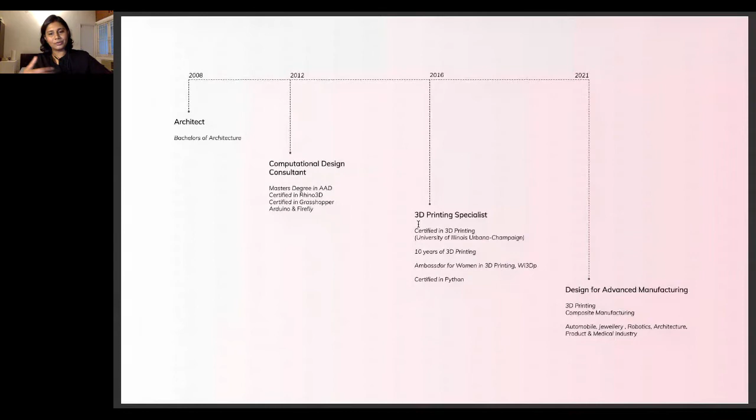Slowly I started working quite a bit on how to develop for 3D printing. A lot of passion comes in for me particularly doing design for 3D printing, so I wanted to slowly become a specialist in this kind of modeling. Since I have a design background, I didn't have much technological expertise, so to bridge that I did a certification on 3D printing, and slowly learned Python so I could code my own complex geometries.

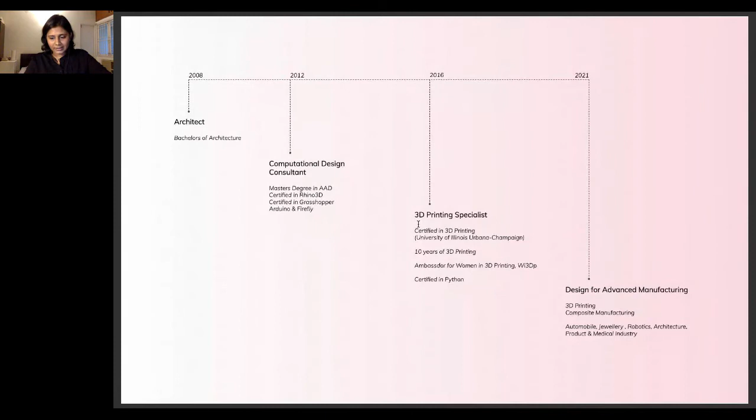Right now, what we've been doing in my company - almost 5 years old - is quite a bit of design consultancy, and not just design but also design development. Let's say someone comes with an idea but has no clue how to make it into an additive manufacturable model - we try to make an efficient and optimized design solution to be manufactured in a very optimized manner. That's part of what we do with the manufacturing consultancy as well.

Prototyping happens on an everyday basis, and one thing I love to do is share my knowledge along with other design teams as well.

So this is in a nutshell what we do, and I've been working with quite a bit of industries: automobile, jewelry, robotics, architecture, and product industry. Today I think this is going to be not more about what projects I've done, but how we've done it, what are the tips and tricks on handling the design process.

I believe that digital technologies are no longer tools for making, but they're primary tools for thinking. There's this famous myth that if you learn quite a bit of digital technologies, your computer becomes your master. That's not true. If you know how to use the right digital tools, your mind is always the master. That is something I really rely on.

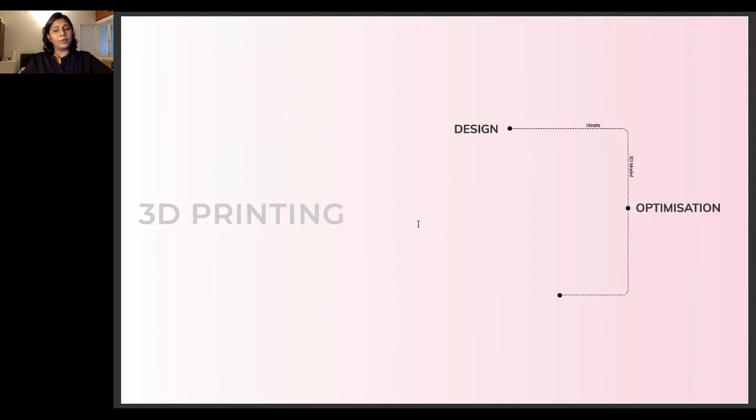In today's presentation, I'm going to be talking about three basic things, and probably highlight design and optimization. So what I mean by design is the process of ideating and then developing a 3D model. And once that is done, how do you optimize it? How do you make it efficient for manufacturing?

There are two things: you'll have to satisfy the clients, and you'll have to satisfy the user group. So we'll be talking a little bit more on those lines.

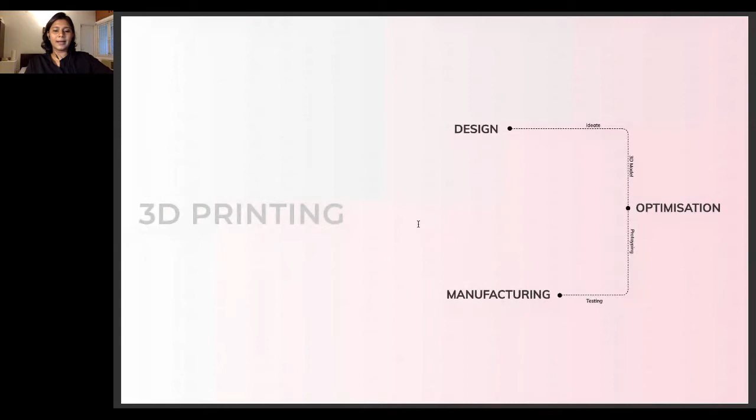And after optimization, how do you do prototyping and testing? What are the patterns of how you can get the user group for testing? We'll be talking about that, and finally the manufacturing process.

So 3D printing has revolutionized the way we think. Previously, you always think, okay, if I would love to design this form, but then is it manufacturable? That is always the question for any designer.

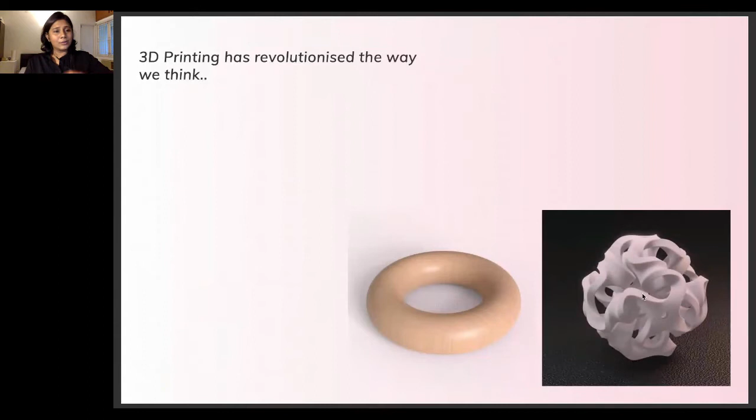Probably 15 years down the lane, you would think of a really simple structure, which doesn't have much patterns on top of it, not much complexity. So you would go with a very simple ring format. Now with 3D printing, your design ideologies can start thinking out of the box, go for complex forms. That is one way 3D printing has kind of revolutionized the thought process.

And the other one is how do you ideate it? Initially, yeah, you can sketch. If you're very good at sketching, cool, you can kind of make people understand how it can be done. But with 3D printing, you can do a quick prototype.

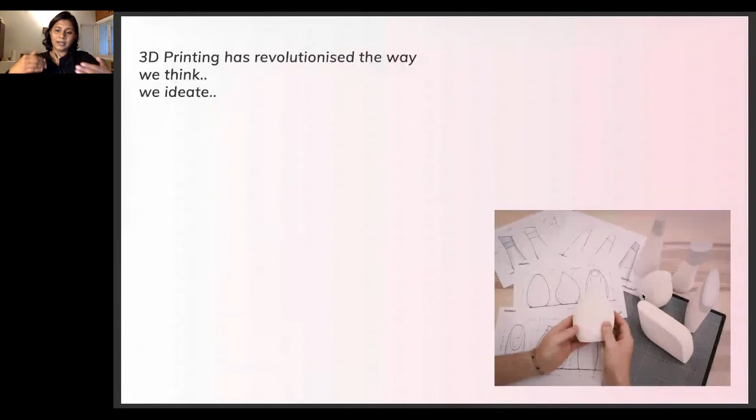I'm not talking about an end user prototype or a prototype that comes much after. I'm talking about in a very early stage, trying to understand the model, the touch and feel of it. Sometimes even the texture of it can be 3D printed. So redefining the aesthetics in an early stage is a very, very important factor.

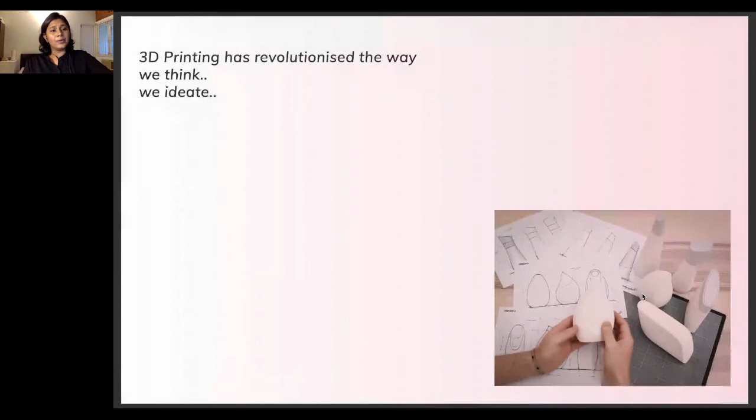Another one is testing out different materials. How will it be if it is transparent, and how will it be when it's opaque? So that's another possibility of your ideation process.

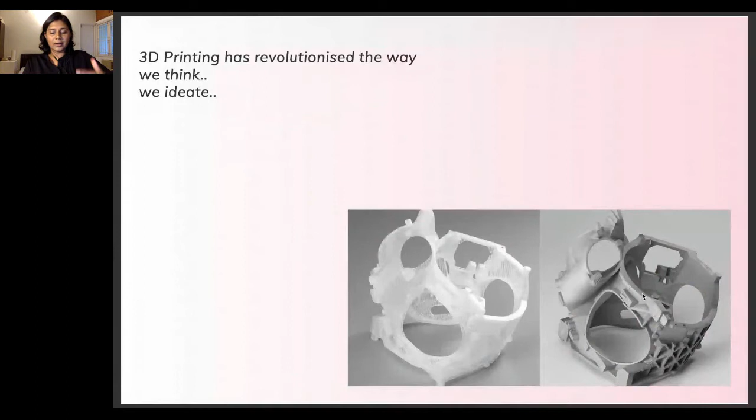And then the production. Production happens from a small part, from looking at a furniture, to this - I think most of you would have seen this - this is a habitat that they're trying to 3D print on Mars. So this is the kind of production variation that we are looking at right now in the whole world.

So the way you kind of think about it, look at this - this is a habitat, the shape of a habitat. Initially, it's all those pitched roofs that you kind of think of if it's Earth. But if it's Mars, you're thinking in a very different form evolution. So this is the whole idea about why I really wanted to stress upon how important it is to understand design, and how it is important to understand the end manufacturing, so you can do justice to both.

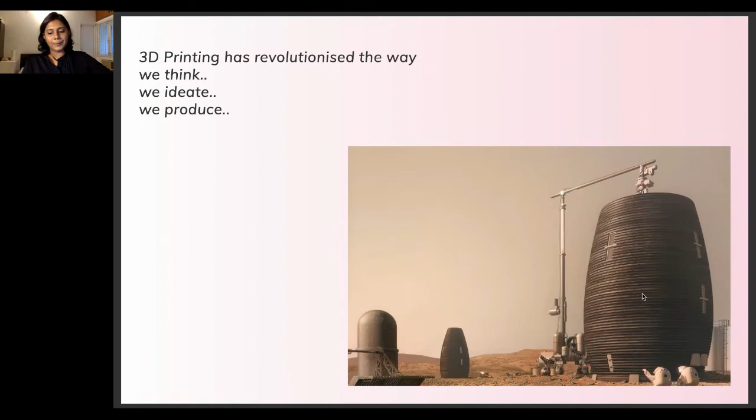Now looking at the process of it, I'm just going to briefly elaborate certain things I wanted to share today. So everything starts with the research and the preliminary data collection. Now understanding the client's brief becomes the most important starting point. And then once you're done with that, how do you collect all the data? Particularly, this is data collection that is a very intensive study on the design of the product.

Now, how do you do that data collection? You initially meet the user group.

Generally what happens is when a designer starts developing a product, once it's ready, probably in the testing time is when most people show it to the user group. But instead of doing that, what if you try to meet the user group in a very preliminary stage, probably in the ideation stage or while you collect data?

That helps you understand and determine the problems, the influencing factors, and the success factors. You set certain parameters, certain rules, and then determine what the design problem is. Once that's done, how do you find the most optimized methods and tools to develop the product, and how iteration works and how you can test it? But there's one thing most of us look at only at the end, which I really want to point out to add it in the front part.

What kind of manufacturing technology are we going to follow for this particular product? What form, what geometry makes it more efficient to be printed? That again comes into a very primary study module, which is your research and data collection—identifying and understanding the related manufacturing feasibility, so you produce a very holistic form.

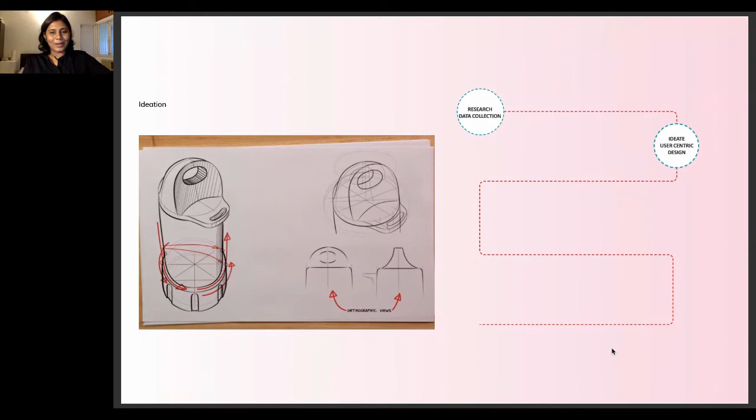Coming to the next stage, when you have the design problem set and the parameters you want to work with—for me personally, though I'm more into digital working, my initial idea is always in terms of a pen and a pencil, because I feel that's the quickest possible way for an output from your brain to come out.

Once that's done, I also try to embrace a particular design strategy called user-centric design, because most products have either a single user group or, in the case of train interiors I design, multiple stakeholders come in—how they touch it, how the anthropometrics work, how the ergonomics work. So user participation and understanding the user experience are very important.

Simultaneously there's the technology—what kind of technology and digital tools you're going to use to aid the manufacturing process. And then comes the business goals—if you want to satisfy your client, you need to find the strategic fit. This could be a whole huge topic, but it's something I cannot skip, which is user-centric design.

Coming to the ideation phase, I wanted to add a few tips on what you'd need to follow while doing 3D printing. The first very important thing is the material you start using. If you're trying to use wood, what is the limitation of wood? How can it 3D print—does it print via powder, or are you using wood with a bit of joinery together?

Maybe a plastic joinery embraced into wood, or a steel joinery embraced into wood. So you can always think of mixing materials along with 3D printing to get a natural feel into it, and innovate on the joinery part. This is something you need to understand first.

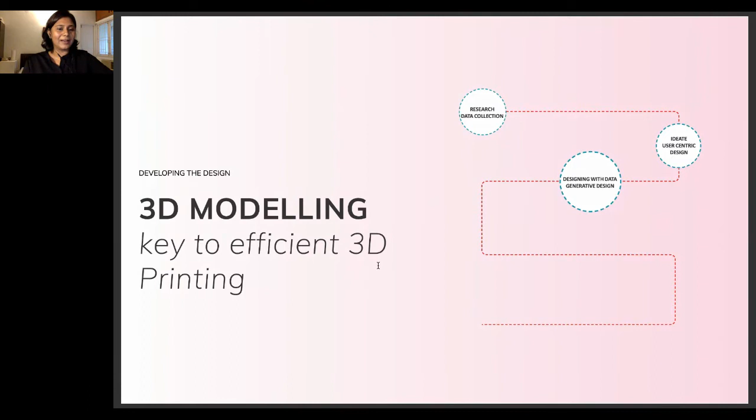So this is the general process for those of you who are a little new. You have an idea, you develop the idea via modeling software—there's Autodesk Fusion, Rhino, CATIA, AutoCAD. So there are quite a few things with which you can generate a 3D model.

The thing is, try to master one. If you can do simple to complex forms over time using one particular software, you'll be able to get advanced into it.

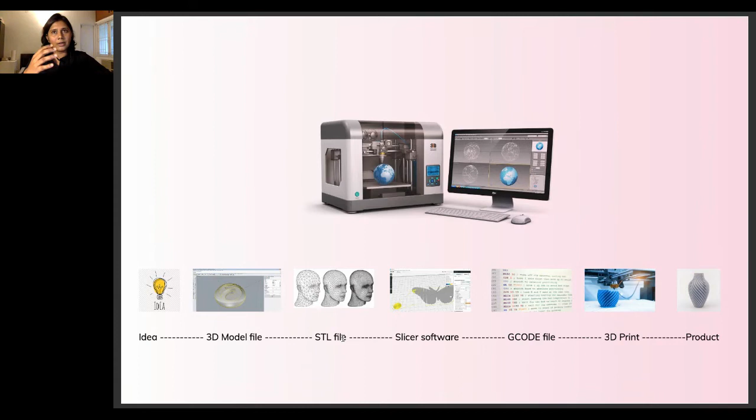Once this is done, you turn it into an STL file. Once the model is ready, there are a few tips and tricks I'll share on how to prepare a 3D model for printing. You slowly move to the slicer software that turns it into G-code and then ultimately prints. It's a very, very simple system—a translation of an idea to a product.

And that's the whole satisfaction and passion for me—that you have an idea, and quickly, in an hour or two, you develop the idea and create an end-user part. All right, so that's one more thing.

I extensively use Rhino—probably the only software I use is Rhino 3D, and I'm also an authorized trainer for this particular software. Grasshopper is another coding language I use for generating designs and iterations of the design. It's a very simple software tool, though this is the power behind the entire work that I do.

So I just wanted to give a little bit of an introduction. This is a NURBS-based software, which allows you to create any organic freeform surface or solid because of their flexibility and accuracy. NURBS models can also be used.

The whole idea of Rhino is also that it's a very good product to use for manufacturing because you have the natural lines, the natural curvature, surface curvature are very, very good, and you don't have much meshing that happens on the surface. So it's a very good thing for manufacturing as well.

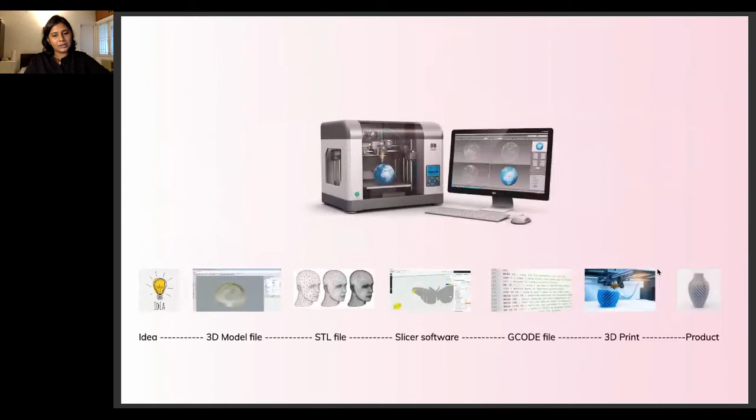We call it a file to factory system. Basically this is a one-stop solution that I use to get the idea, develop the idea, prepare the file for 3D printing and convert it into an STL. The entire process I showed you before, all happens in one shot.

And then I prepare the G-code file. In this particular software there are quite a bit of features, so I'm just showing you the first very important four things because we don't have a lot of time. But if anybody has any doubts on how you convert your idea or do 3D modeling, I'm always open to connect.

So the very first thing, coming to tips and tricks on how you handle 3D models: the first important thing is to work on a scale. Working on the right scale and the precision is the key to modeling.

The second one is working with functional prototypes. This is something I've seen as the most common error in most companies or individual cases. Particularly when you're working on functional prototypes that need to fit in and fit out, you'll notice that the minute you print, it doesn't fit. That's because of the tolerances.

Another is there's a really good command in Rhino that we use, which is for checking for bad objects. Everything may seem really good, but then when you put it on an STL software, you'll notice there's some error coming up. So you can use check for bad objects, which points out exactly where there's surface undulation, surface violation, or even an overlap in terms of structural error in a geometry. Then you can slowly patch up your model.

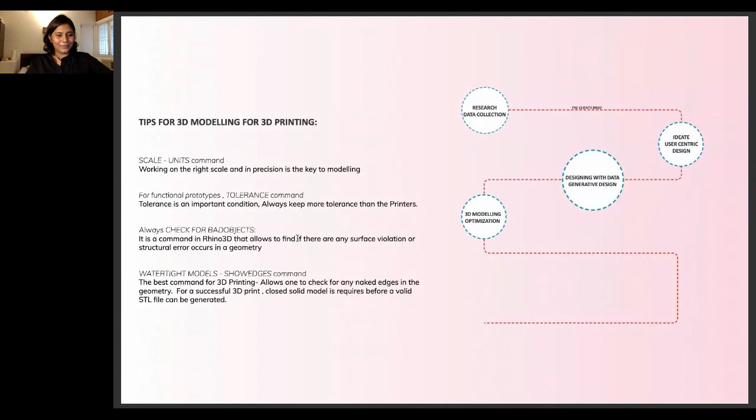So yeah, these are the tips. There are definitely 100 more tips I can tell you while working on this. But feel free to mail me or ask me for more solutions.

So particularly when it comes to design and optimization — let's say you've done a few ideas, but then the client wants a much more efficient manufacturing process. The next few conditions I'm going to show you are more about how much time it takes, and it's more into FDM technology, because we work with multiple industrial designers who make limited editions and so on.

So I'm just going to share a few simple conditions to start making you question, while you design, whether this shape will be good or that shape will be good — what are the most efficient shapes. Today I'll be showing a few conditions called the corner conditions.

We've tested a few geometries out. Let's say you take a sharp corner, a rounded corner, and a chamfer corner. All the volumes are almost similar, and the dimensions are almost similar.

What you notice is that for a nozzle or a travel path to take for 3D printing, the print time takes around 1 hour 18 minutes for a sharp corner. You would notice that out of these three, the least that is taken is 1 hour 11 minutes, which is a chamfer corner, but also because you've eaten quite a bit of the corner portions, right?

But then let's say that the fillet corner is one of the least compared to the sharp and the chamfer corner. So what I'm trying to say here is, what if you mix and match? I've tried to fuse a chamfer corner and a fillet corner to attain a more optimized solution in terms of timing, the weight, the material used, and the product weight as well.

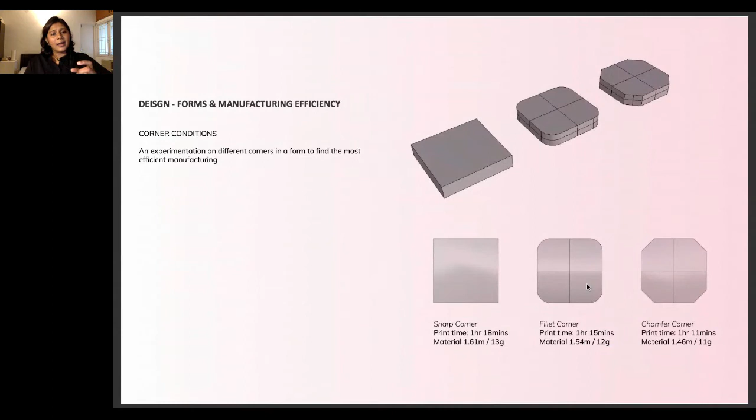So these are small conditions that you can see. This will make a great change in aesthetics as well, and in terms of consumption and optimization. So it will be a win-win situation from a form perspective and a client perspective, and also in terms of user group, because the more smooth it is, the more elegant a product tends to look. So this is one corner condition that we work on in most industrial projects as well.

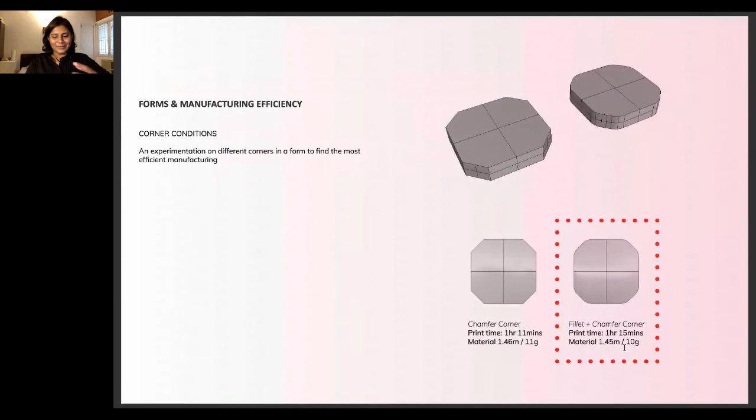And a lot of emotions too get generated whenever you round an edge. The tension becomes lesser as well. So yeah, definitely I would go for the last one here.

So similarly, looking at porosity conditions, I've been working with quite a bit of understanding how do you work with facades, and how do you optimize those solutions for 3D printing as well. So these are few examples. Think of it as a simple window geometry where you're trying to 3D print.

One is a general void, but this is an FDM based experimentation as well. The first one is an open condition, the second one is a horizontal louver and a vertical louver. Let's say that all three of them need to be printed not on the base plate, but on a vertical position. So finding the optimized solution of the form also matters here.

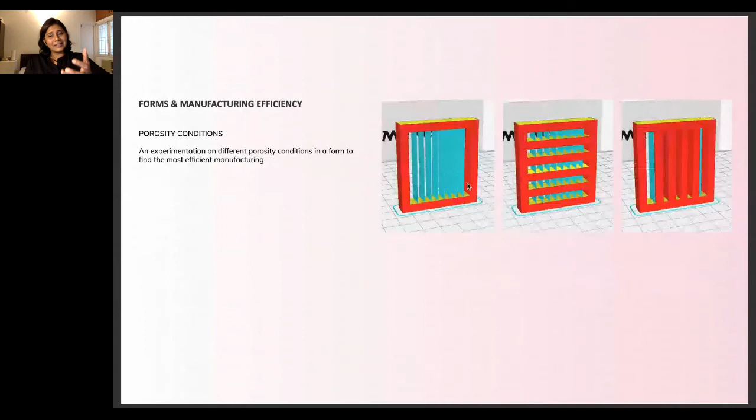So if you look at it again, in the first case the supports get generated, in the second case, since it's horizontal, the supports get generated, which is a lot of added post-production and so on. But in the last case, since I have vertical louvers, it kind of acts as a support itself, right?

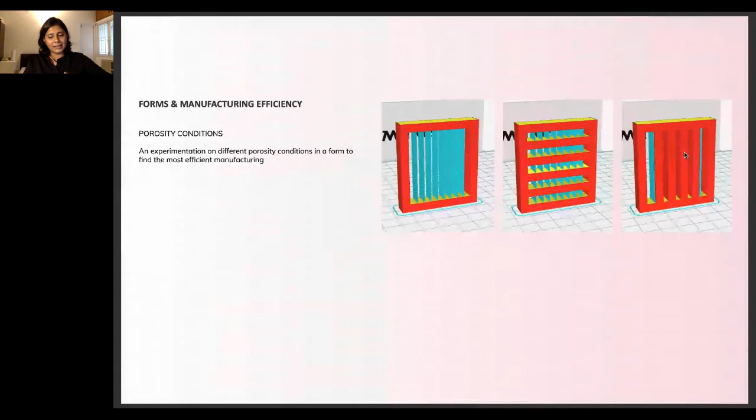So if you again look at this, you will also notice that definitely the void consumes lesser time because that doesn't have much material information. But if you compare horizontal and vertical louvers, notice that again the optimization happens more for a vertical louver rather than for a horizontal louver.

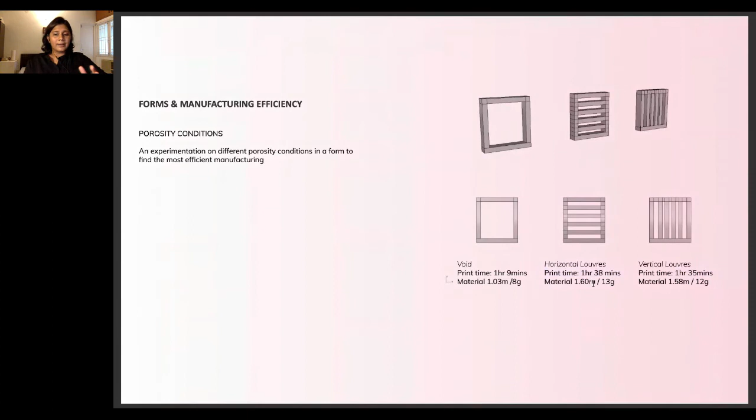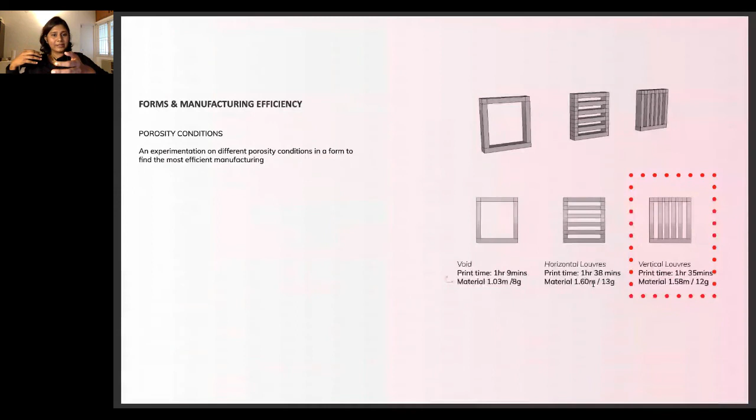So all these things, if you connect what I told before in terms of design optimization, particularly when you're in a design ideation phase, how do you incorporate what happens in the manufacturing stage? So these two connect quite a bit. And instead of using this in a testing and simulation phase, try and use this process in a much earlier design stage as well.

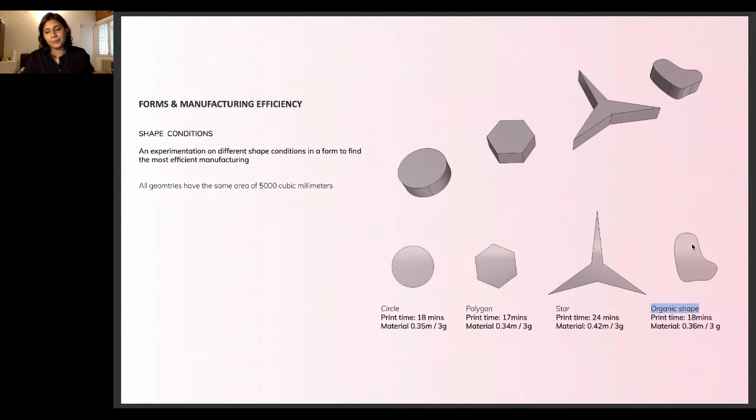But very closely with a circle geometry or with an organic shape as well. Again, there is a lot of definition on how you define an organic shape, what kind of shapes, what kind of direction that goes in, which is the next part of research that I've been working on. Probably I can share those with you guys in the next year.

So this is with respect to the shape conditions that you can think of on a form level, particularly when you design. And definitely iterations are a very, very important thing. You can test multiple things, and how we also test it is we either use Slicer or we use Grasshopper, which is a coding language that helps us create multiple iterations for a singular form.

This particular one, what I wanted to convey was not just form. I've kind of combined shape, form, and porosity condition into this.

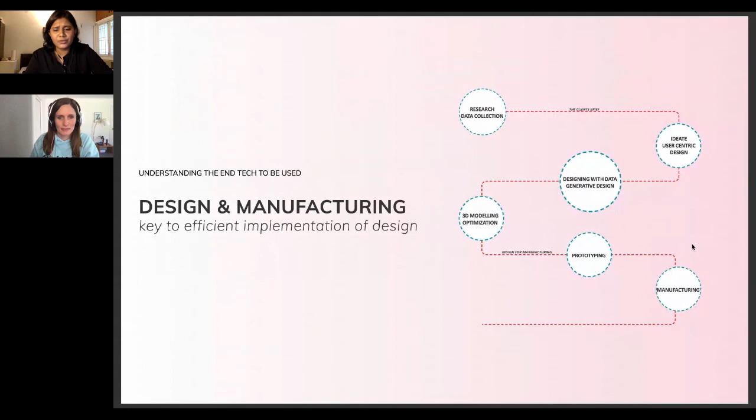So this is another project. The first one is for on-demand manufacturing, and this one I wanted to speak about mass customization, where we use design and scripting for creating the end product.

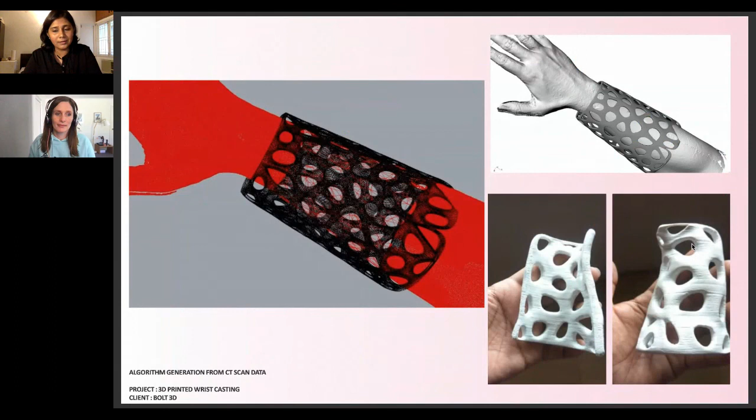That's quite some things I wanted to talk about. Another small track I wanted to introduce for designers to contemplate is on-site construction, like how you develop products and what different technologies you'll need to understand. Those are things designers need to think about, and also what other types of technologies are available. Like if you're helping a jewelry designer, what is the best technique or technology to go in for? That's very important for any designer to understand, to get the right technical or technological background to go ahead in this career.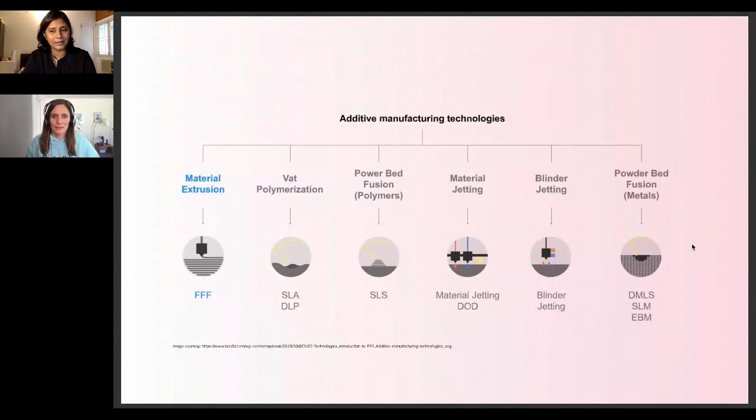Design and 3D model is the path to a good 3D print, and 3D print will revolutionize the way we think, realize, and produce. So all I want to end with is to say, if you're a designer or any other background, always upskill and adapt to change.

Thank you. Thank you so much, Kavitha. You ended on a really great piece of advice there. I think upskill and adapt to change is a fabulous message. It's clear that through your career, that's what you've been doing, continually adding to your skill base, which is very impressive.